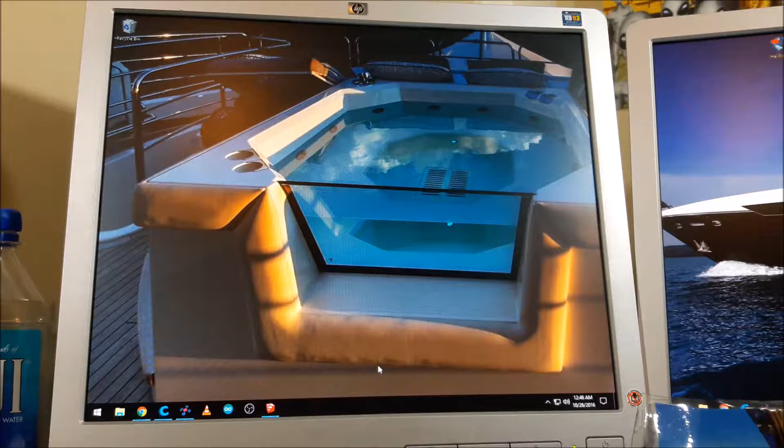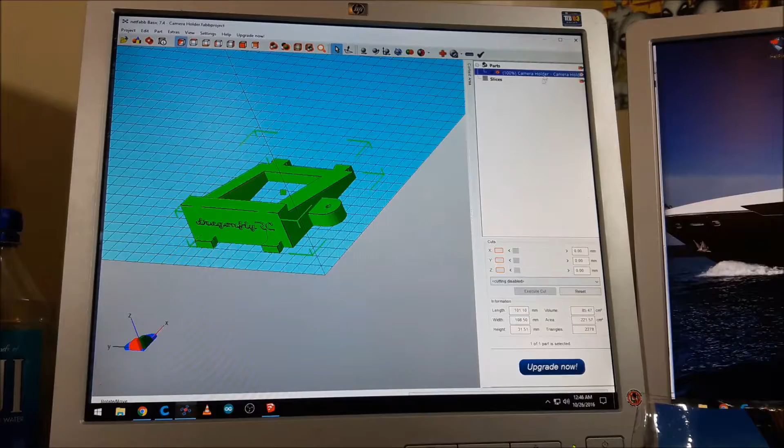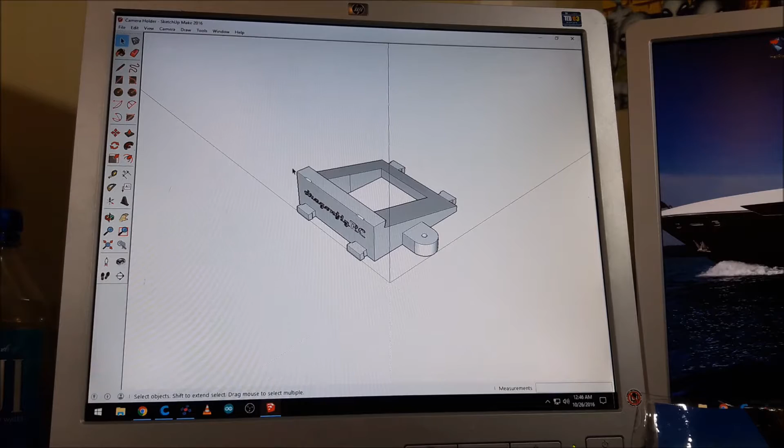So we're going to repair some STL files so that we can print them. Over my two years of dealing with 3D printers, second printer now, I spent a lot of time just clicking on random stuff trying to fix a file so my printer would print it. This is the process you go through to check and make sure your printer will be able to print your file.

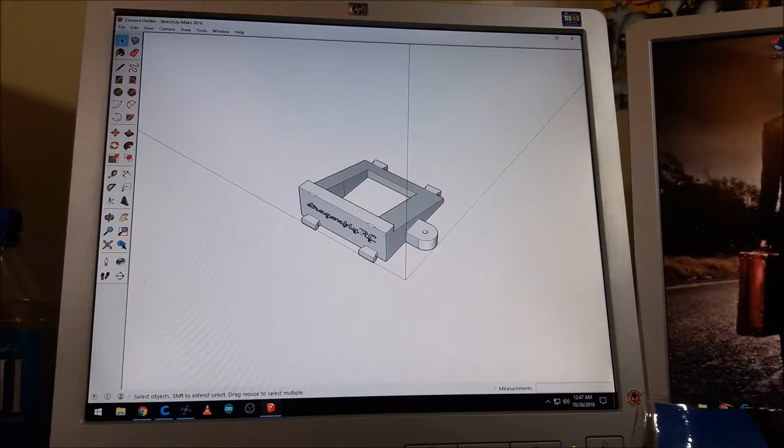Alright, the first of three programs: I use Google SketchUp Make, very easy to use. This is a piece I designed. I'm filming this on my camera, which is held on one of those movable desk lamps with arms and a spring load. I took the lamp off and put a bar on there, and rubber banded my phone to it. That's my stand. So I made this little thing here that will bolt into the stand, and I'm printing it right now.

So we want to print that, right? First thing we do is highlight it all. I clicked on it a bunch of times so it was all blue with dots all over it. Now we come over to File, and we're going to Export STL.

Now if you're new to this, Google SketchUp may not have this built in. Different versions have had it and others haven't. You want the Export STL right here under Print Setup. This is an extension - if you don't have it, just do a Google search and it'll tell you how to install it. It's not hard, just a quick little file to download.

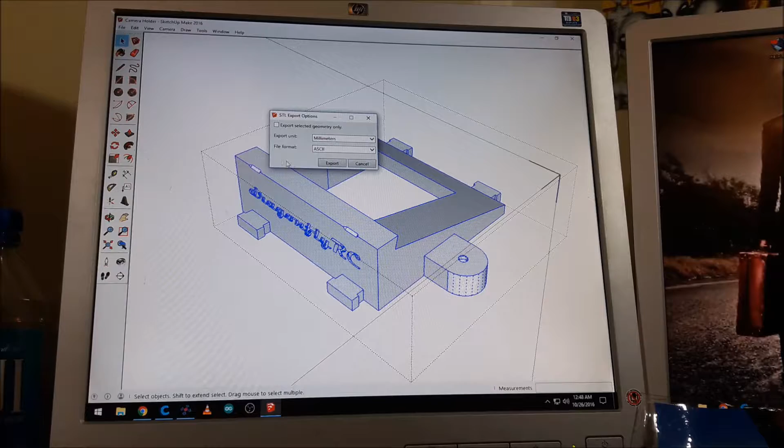So I'm going to export that and leave it in millimeters and ASCII too, then export and save it where I want. I'll just go ahead and resave over this one since we're going to repair it again. Okay, so we did that. We're going to X out of it - I don't want to resave.

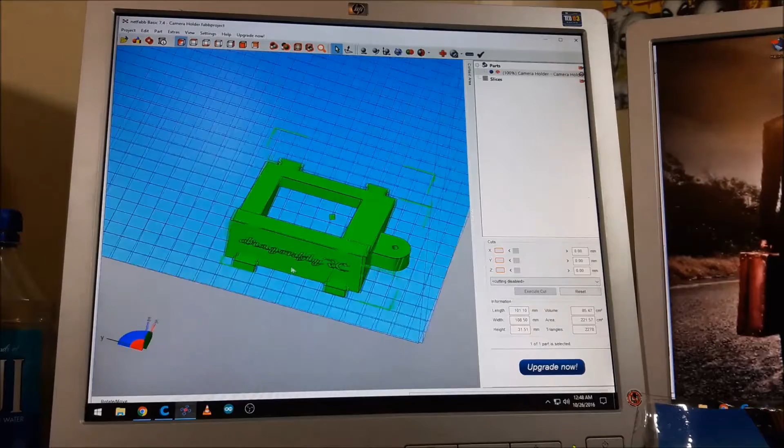Alright, next we're going to come to netfabb Basic. I have version 7.4 - there may be a newer version, but once something works, I don't mess with downloading a newer version right away, because it takes like a whole day to figure out why it's not working. So I open it in netfabb here, and regardless of whether it needs to be fixed or not, it'll tell you with a little triangle down here.

I fix it anyway. This sequence of clicks will fix your drawing, and I've never had a problem - it's always printed. Even when something like a wall is missing in the drawing, it fixes that, but it'll tell you right away if it's that screwed up. So what you do is click on this red cross repair, make sure we're on the Actions tab, and click Detect. Now stitch triangles - I skipped over warp, I'm stitching triangles. Fix flipped triangles. Remove double triangles. Remove degenerate faces. Click OK on that one.

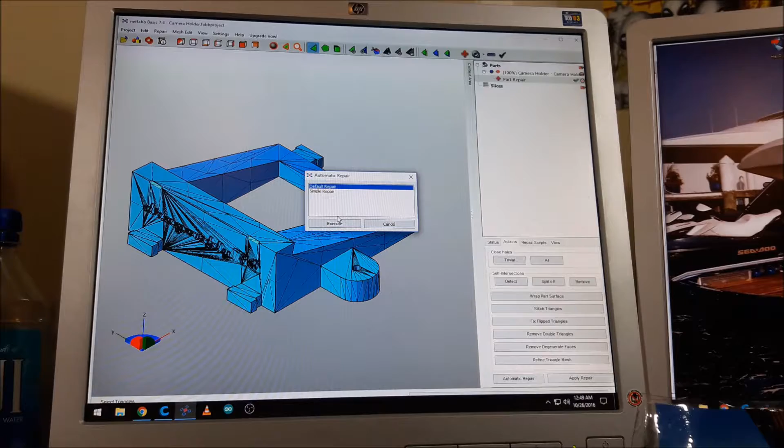Now repeat that again: Detect, come down to stitch, next one down fix, next one down remove, last one remove degenerate faces. OK it. Now automatic repair - Execute, Apply repair, Remove old part. Done. It's fixed. Now you can print it.

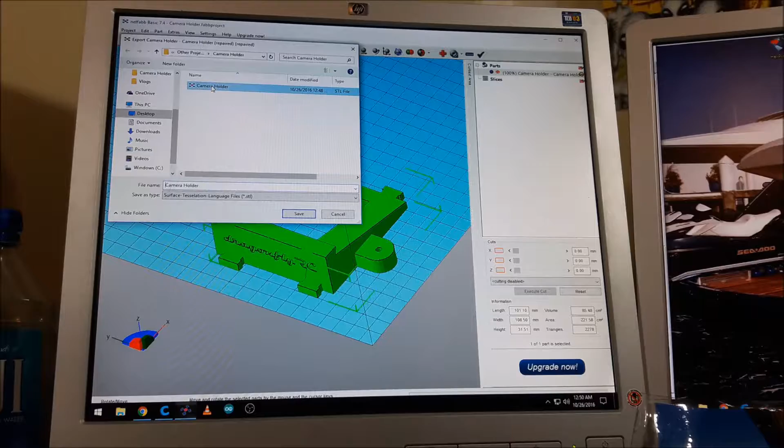So we want to get this repaired part out and save it. We come up here to Part, down to the third option, Export Part, and go to STL ASCII 2 and click on that. Now it wants to save it as 'repaired' or whatever, but we just want to replace our original file. So if we click on that original file, it'll re-enter that name, and we'll just save it over that one. And yes.

Alright, so now we have a repaired drawing file. This is your third program, the one that runs the printer. I have a Printrbot Simple, so I use Cura 15.something, and these are the settings I use. I print at 195 now.

I was printing higher, but it works better lower. It's weird - it makes you think it needs more heat, but this is where it likes to be for the stuff I use, at 195. Then I lower the speed just a little bit to make sure it prints. It comes at 40, I have it at 34, and those are the settings - I don't really touch anything else. You could go to plugins and tweak things at certain heights. I've done that, and it just turned out to be a pain in the butt.

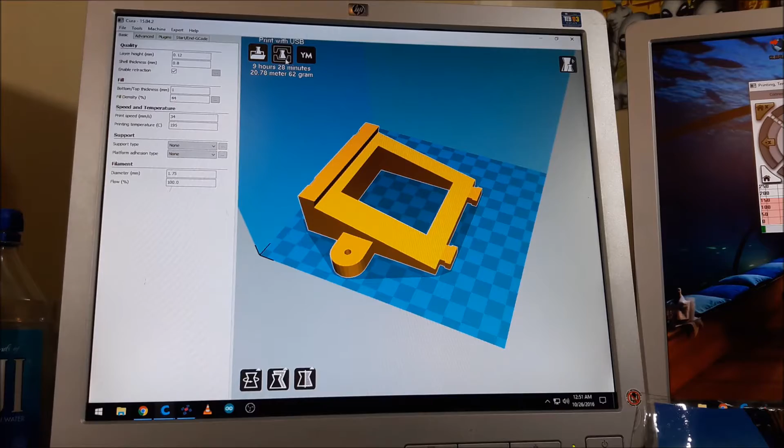Alright, it's printing right now, but normally you would click Load, grab that file, place it where you want, and then print. You click on that one and this menu shows up. You'll home it by hitting X and Y, then print it. And so that's what I did, and we're printing now. We just started printing that one.

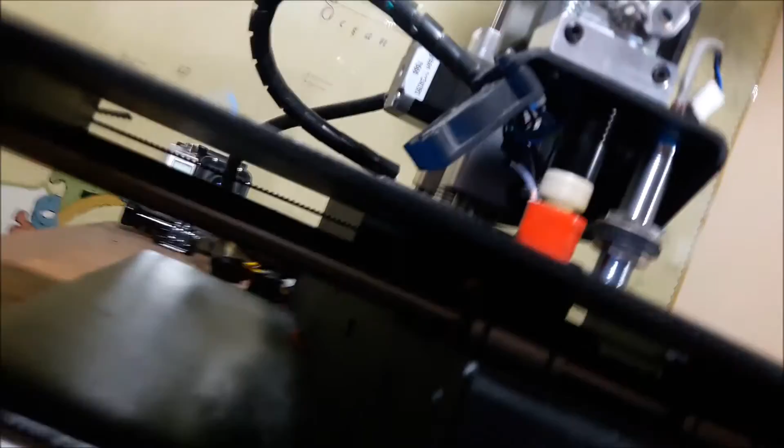This holder thing that's going to hold the phone is going to hold it at more of an angle. I'm going to pull this out of the stand to give a quick example - I should be holding it more like that. There's a bit of an angle to it, you can see. And those little bars on top and on the bottom there are for the rubber bands to hold it tight against there. So we'll see how that turns out.